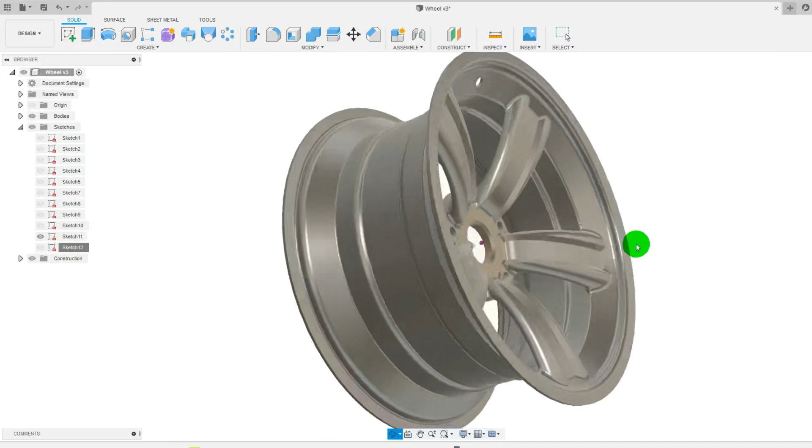I've recently started Fusion 360. I'm probably about 10 hours in, and I was able to make this wheel. I've been really enjoying Fusion 360, so let's go over how to make this, or at least how I made it. I did not use surfacing, and that would have been a great way to make a wheel too. So if you're not familiar with surfacing, this could be the video for you. Let's get started by making either this exact wheel or one much like it.

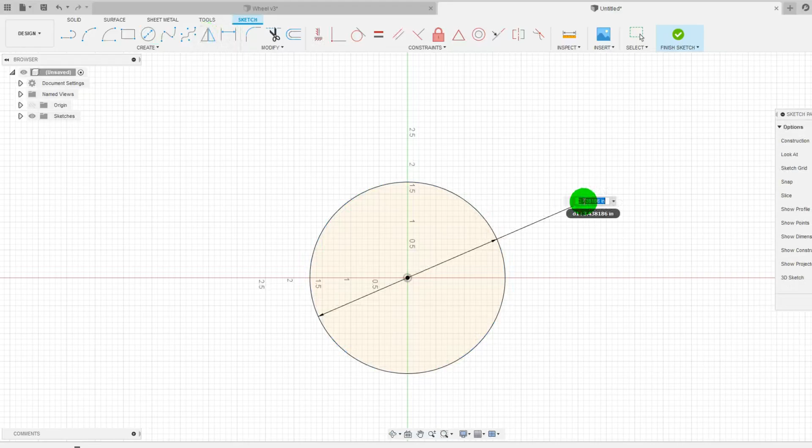I'm going to start with a new design, and let's start by creating a sketch on this face, and I'm going to start by making a mounting plate.

Let's make that 5.5 inches in diameter. We'll make a second circle, and we can make that vertical with the origin. And we'll give that a dimension of something like 2.25, and we'll give this a diameter of something like 1/2 inch.

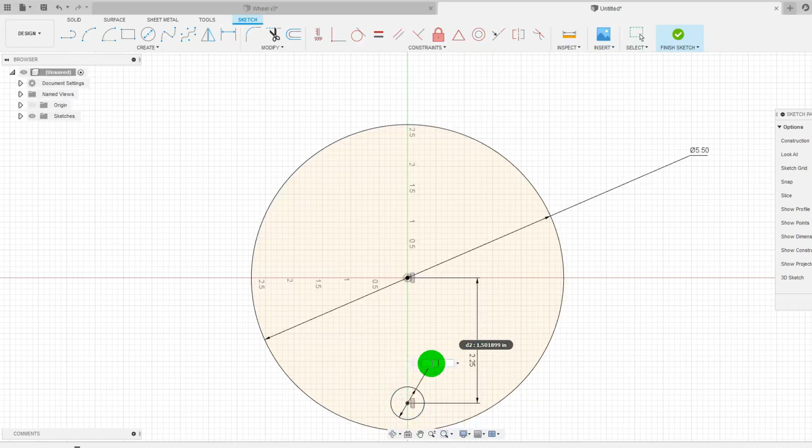And let's go ahead and extrude that. So we'll extrude this profile, a distance of say 0.5 inches. That looks about right. And I can immediately do a circular pattern to cover all the holes. I think it's a little bit more efficient to do a pattern than to sketch it out.

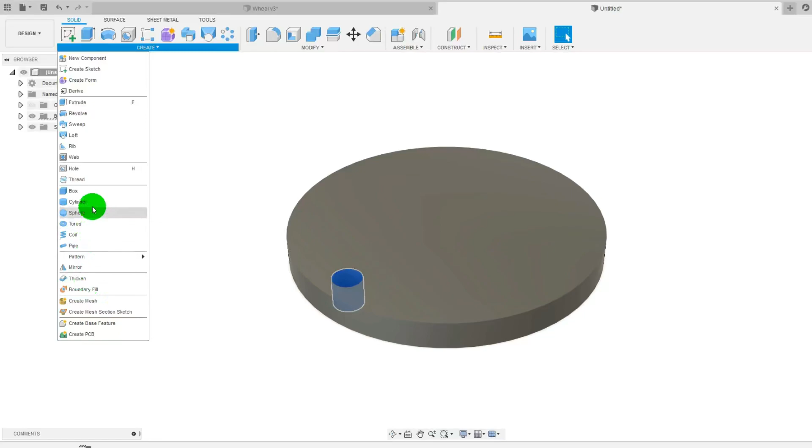So we'll go with pattern, circular pattern. I've got this object selected. Axis will be here. It's a wonderful feature to add the axes in like that in the graphics display. We'll say OK, and there's our pattern.

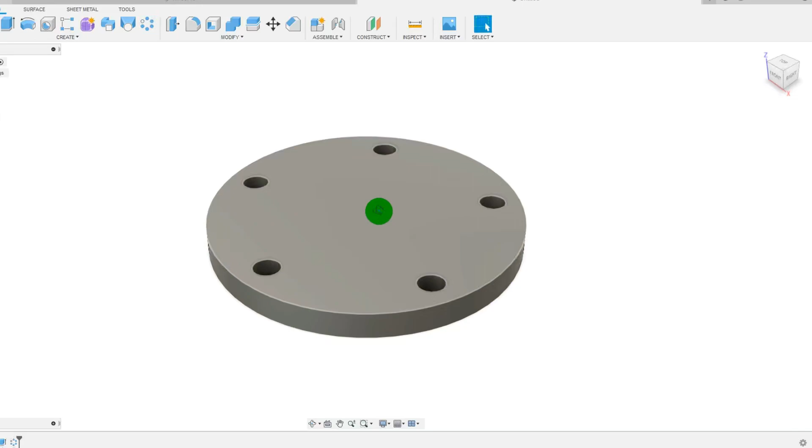The next thing that I want to do is maybe make a sketch for my spoke, and I can do that right on this face. I'm going to start with a center point arc off of the origin.

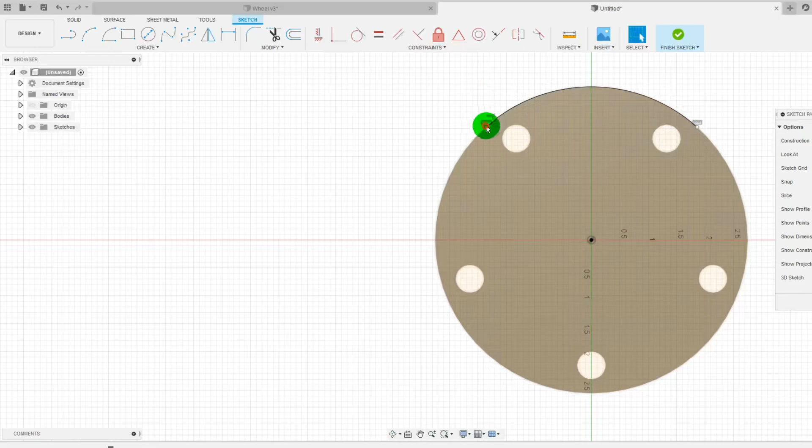Fusion already knew that I wanted to make that coincident onto the edge of my face, and by making them horizontal, we've only got 1 degree of freedom, and I really like the way that it illustrates the degrees of freedom. So to sure that up, let's give this a dimension. We're going to call that 1.95 inches.

I'm going to make a 3-point arc now, and I'm going to make this horizontal to its center point so it ends on vertical, going straight out. We can give that a radius, and I'd like to make that 1.75 inches.

From here, we'll do a line and a line and a line. We'll do an angle. 135, 1 inch.

This point to the origin, we're going to make 1.675, so that the spoke protrudes in a little bit.

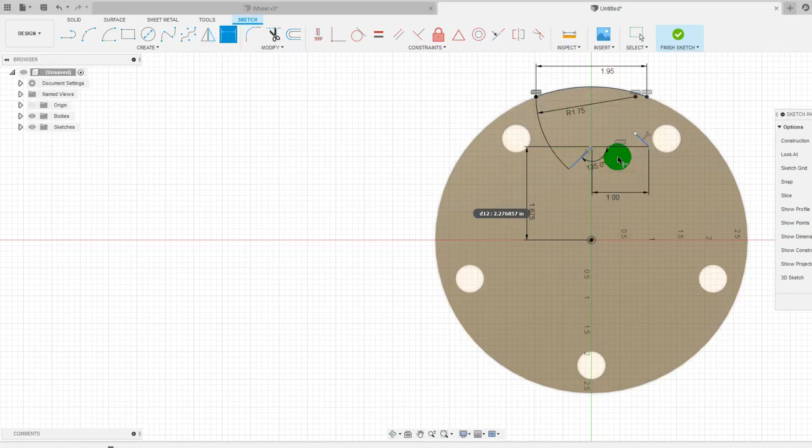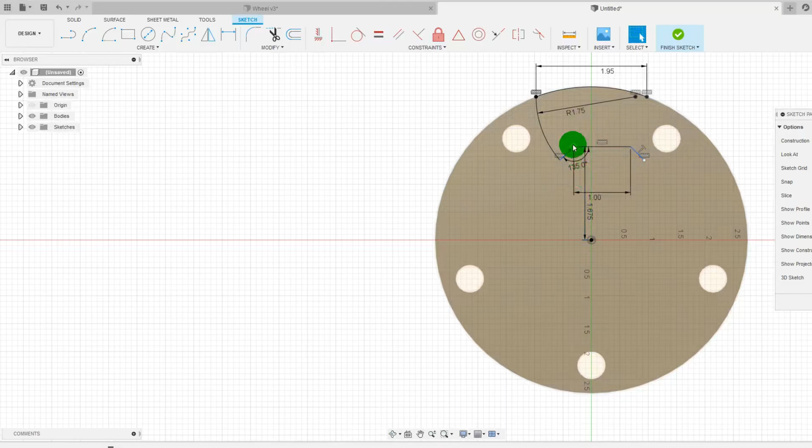And I can go ahead and select these two, make them horizontal, so we have more of a symmetric feel to it. And also, I'll come up here and choose equal length between these two. Oh, but I've got an over-defined error, so maybe we won't. Since they're horizontal, that's pretty good.

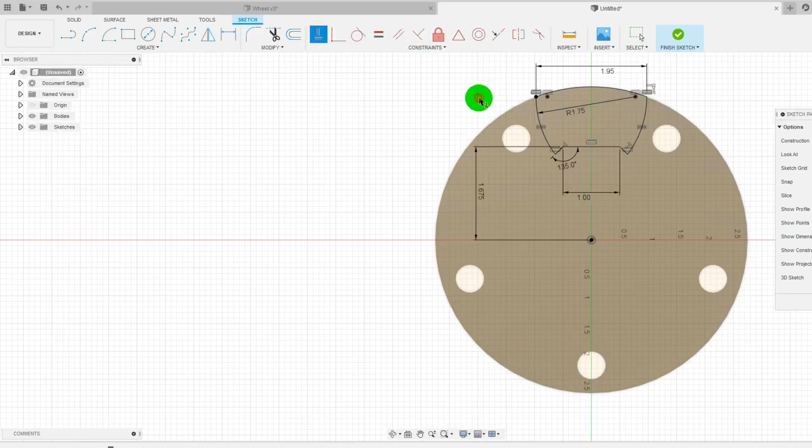I guess the last thing to do is add an arc. Oh, that's a center point arc. We'll add an arc on the other side here. We're going to choose equal between these two. We're going to take here and here, make it horizontal, and there we're fully defined. So I'll finish that sketch.

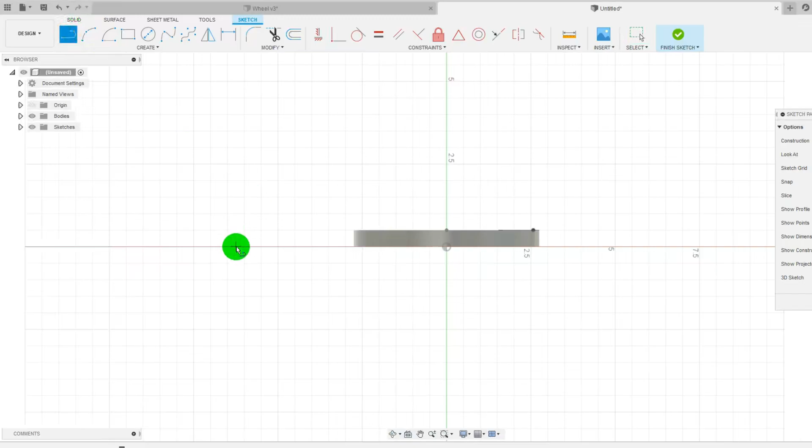Let's move on to the next one. I think we'd be wise to make an outer body for the rim. So let's create a sketch here, and let's get cracking on that other sketch here. So I'm going to make this horizontal with the origin. I can make that a simple distance of 1 inch.

Next thing to do, we'll grab a 3-point arc and another 3-point arc. I'm going to choose tangent between these two, and we're going to make that horizontal so that these points will be tangent to vertical.

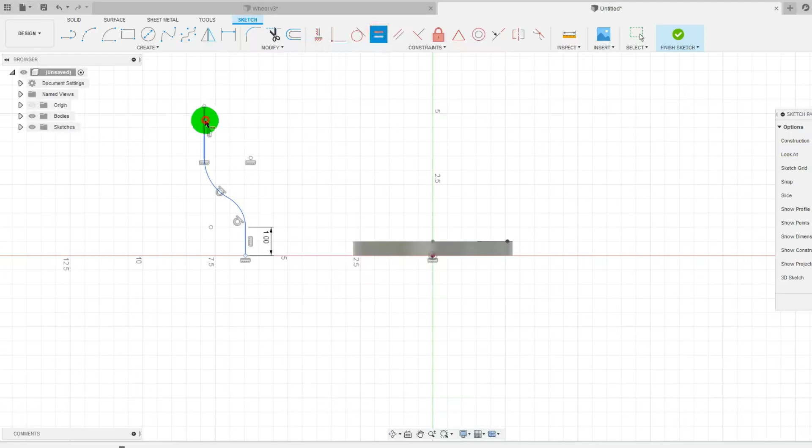And make another vertical line. I meant to snap those together, so we'll make those coincident. And I'm going to choose this line. I'll choose the equal relation between these two lines, so they're both an inch.

And the question is, how much do we want to offset these arcs? We're going to go from here to here. We're going to make that 0.15. Except I don't think I've got my tangent relation.

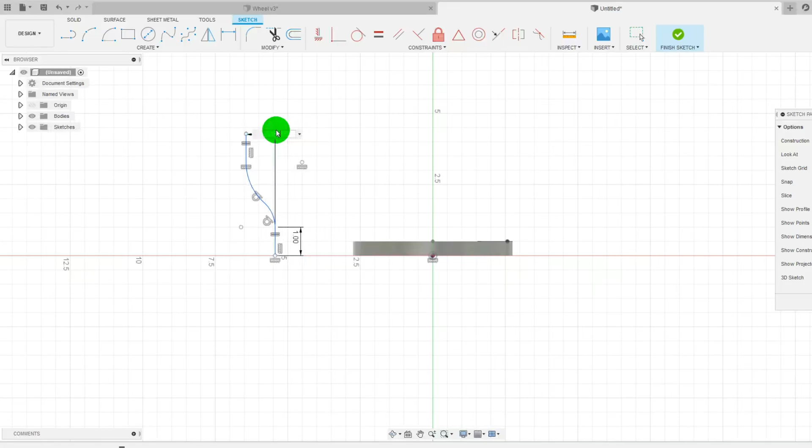I guess I do, but it's snapping in the wrong way, so maybe I'll step it down to 1, then 0.5, and then 0.15. That looks about right.

I'm going to bring these two arcs a little bit closer together, and highlight them to make sure that they're equal. That'd be a great constraint to have as well. Well, actually they shouldn't be equal, because we're talking about having a consistent thickness, and one would be an outer radius and the other would be an inner radius. So let's get rid of that constraint, on second thought, to keep a consistent bending profile.

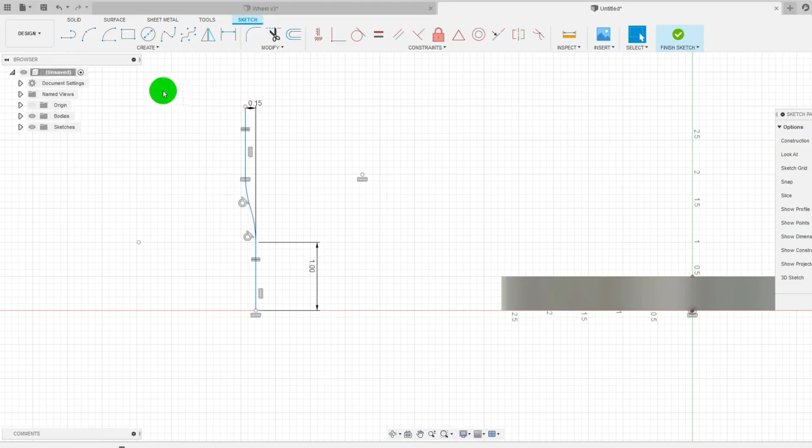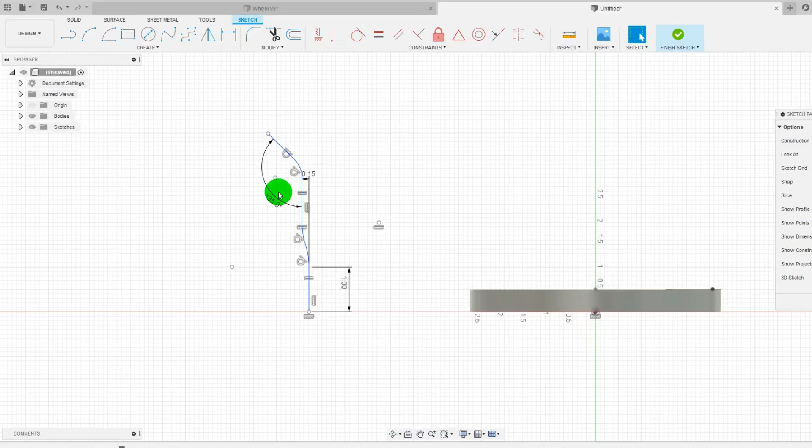But the next thing I'd want to do is add a 3-point arc up here and connect that into a line. I know I ought to be using the actual tool that converts a line into a 3-point arc. That would be handy. Let's grab here and say 135, then grab a 3-point arc here, and I love that it added that tangent.

We'll select these 2 points and make them horizontal. We're going to come up here with a straight line. Oh, I accidentally drew 2, so instead I'll add in my 3-point arc, again with the tangent tool, and we'll select these 2 and make them vertical.

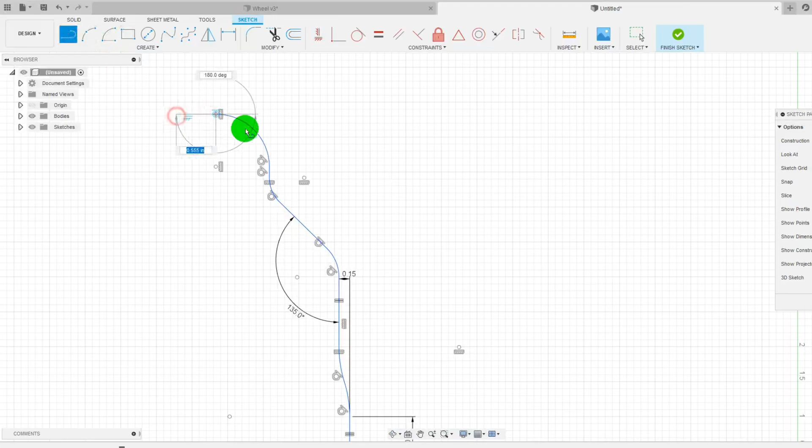Okay, so this is the point where I get to choose some of the other dimensions, like what rim diameter I want. Let's try something like an 18-inch wheel, so that would be a 9-inch radius, I guess. And then from this outer point to here, we can offset that by something like 0.75 inches.

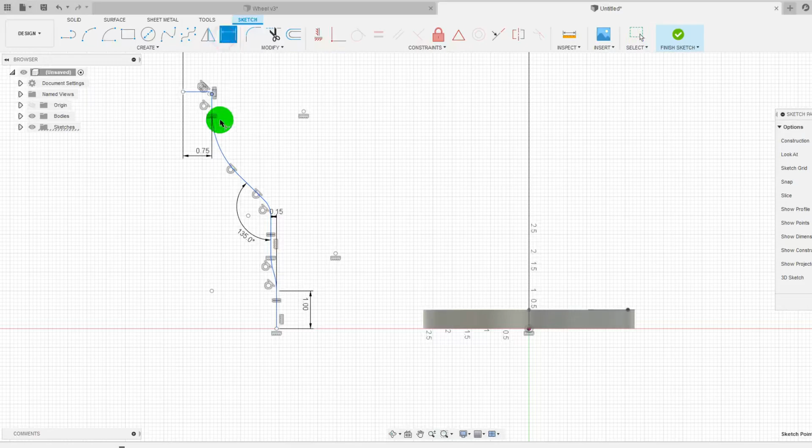I can do the same thing from here. Oh, I got 2 points selected there. From here to here, let's go with something like 1 inch.

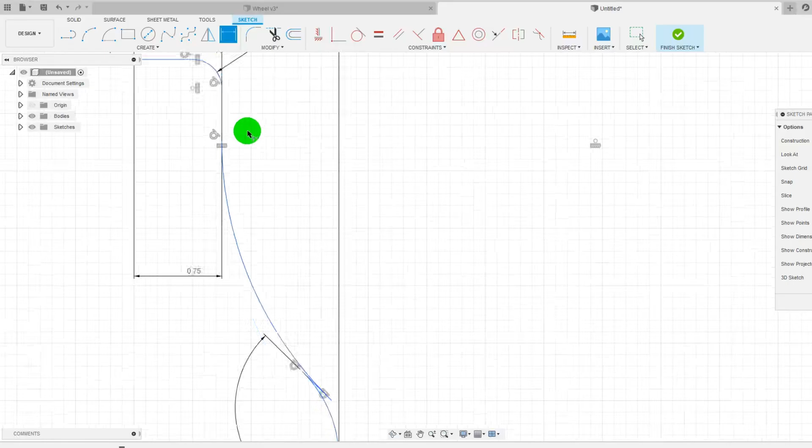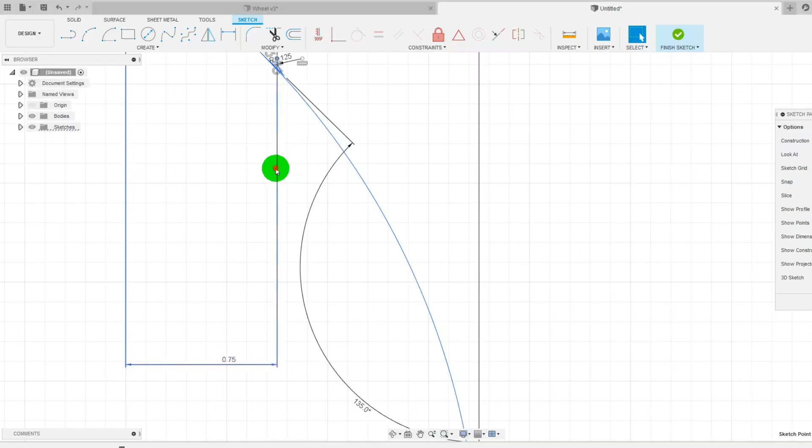And then let's make an outer radius. Let's establish that if we're going to add thickness on this side, our outer radius is going to be 0.25, right, 1/4 inch. And that means that this is an inner radius, and let's say we want 1/8 inch thickness, so that would be, of course, a 1/4 inch minus an 1/8 inch is an 1/8 inch, so that's our remaining radius. We move that back down where it belongs.

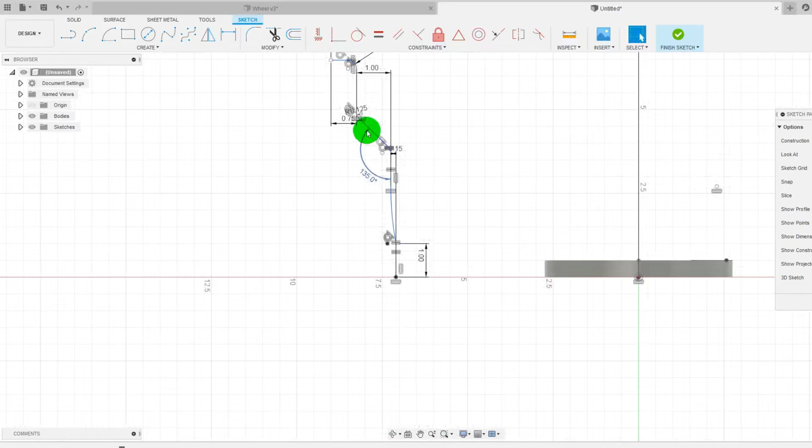So since these have basically the same concavity, as you can think about it, then we'll make those equal, and this has the same concavity as that, so we can make that equal here. And then I have a concavity going this way, which I can make these equal. And that defines most of our sketch, but the question is,

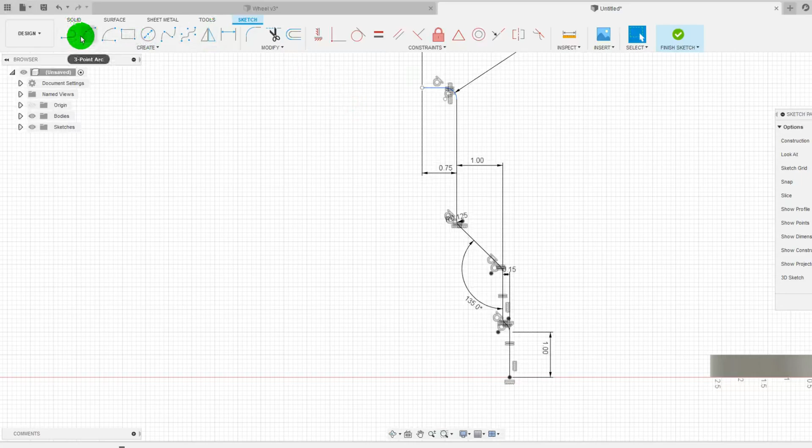what width do we want on the rim? To answer that, I'm going to go with, say, something that's 9 inches wide. And to do that, we go to our 0 point, right? This is going to be a 0 offset, and this is where you decide your offset to.

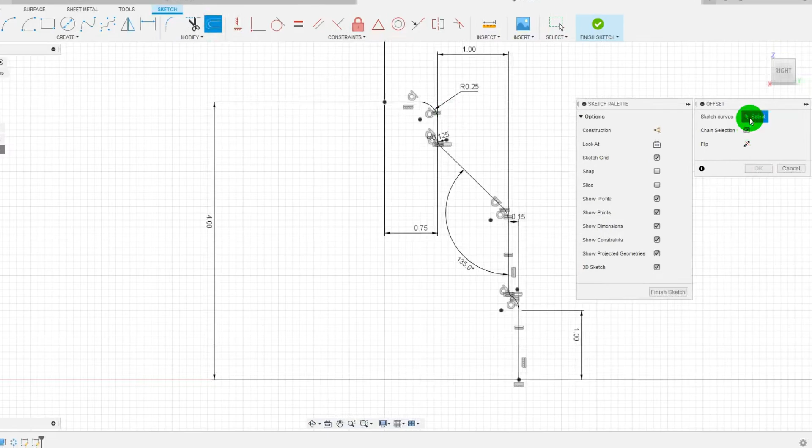With that fully defined, let's do an offset function here. It'll ask me which sketch curves to offset. We're going to say negative 0.125, and OK. And there we go. So we've got a consistent profile that's been offset.

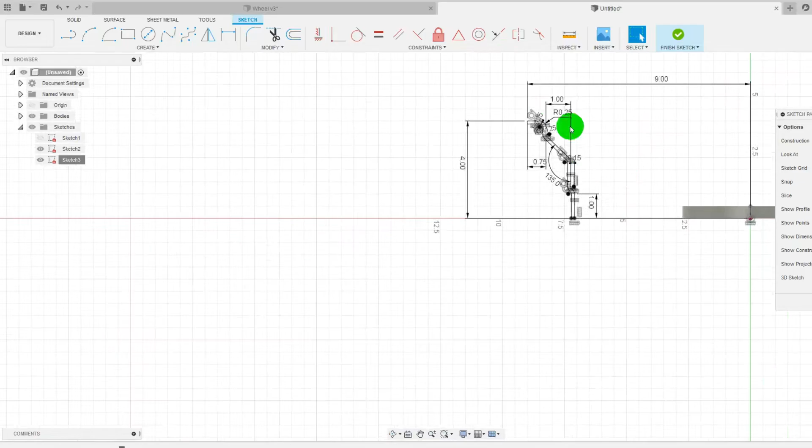The last thing to do is this here. And now we would probably want to mirror some sketch entities. So in order to mirror, I'm going to create a construction line, right? We're going to create a line from here to the origin, and then I highlight this line, construction. Now I can say mirror,

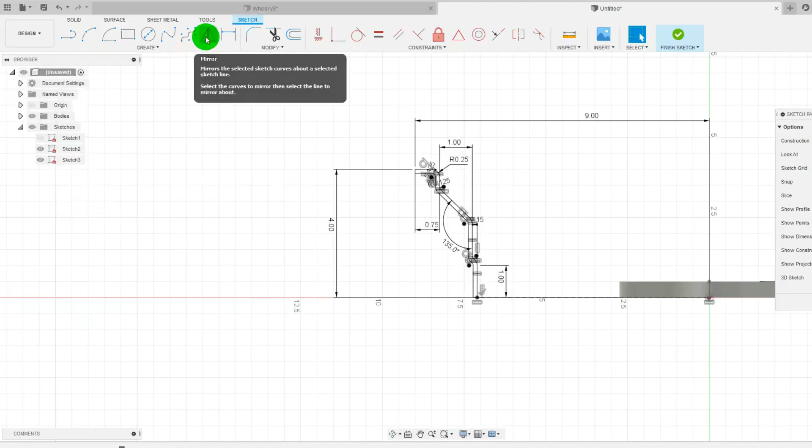or I can just choose it from over here. We're going to select objects, and then we can select mirror line. It gives me a nice preview. We'll say finish sketch. And one thing I want to check is to make sure that I have an enclosed volume. It looks like I do.

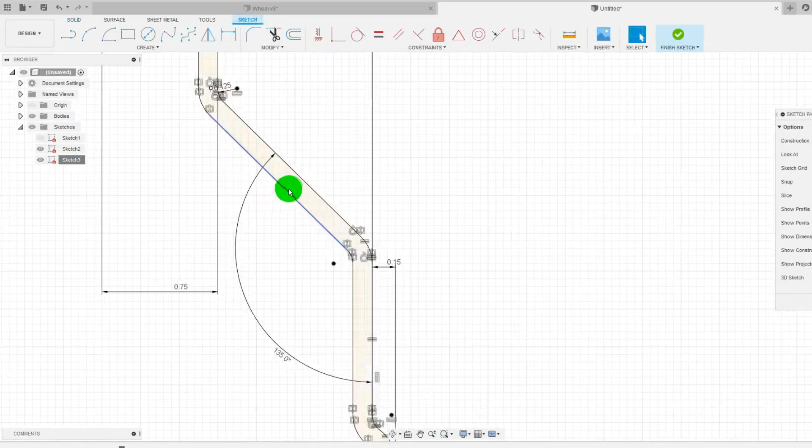You can see a difference in shade from the inside of the sketch to the plain background. So make sure that, yeah, it doesn't look like there's a solid line there. So we've done everything correctly.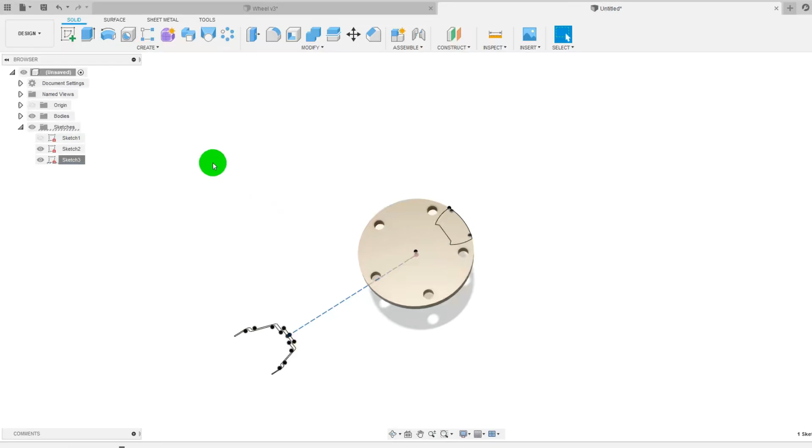The next thing I can do is to start my revolve. And that's kind of enjoyable because you start to see the wheel coming together. We're going to say revolve, choose a profile, which I would like to make my sketch, and then we're going to choose axis, vertical axis. And that is looking kind of wheel-ish to me.

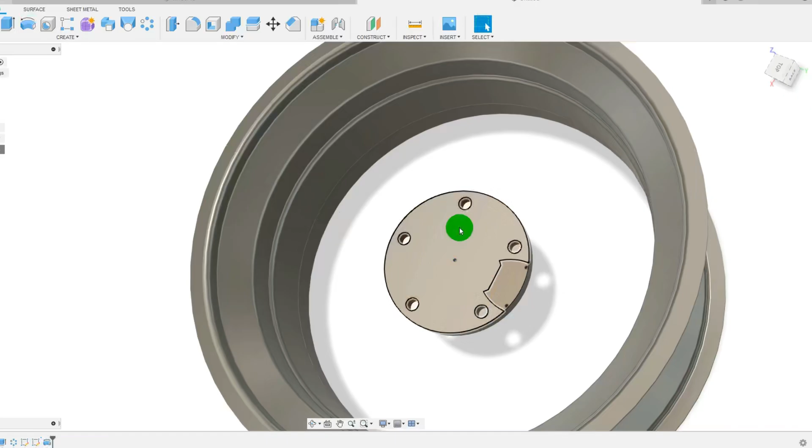So we'll say OK on that. Next thing to do is make a second sketch for our spoke. Let's do that by creating a sketch. Actually, let's finish sketch. I can delete that, didn't mean to do that.

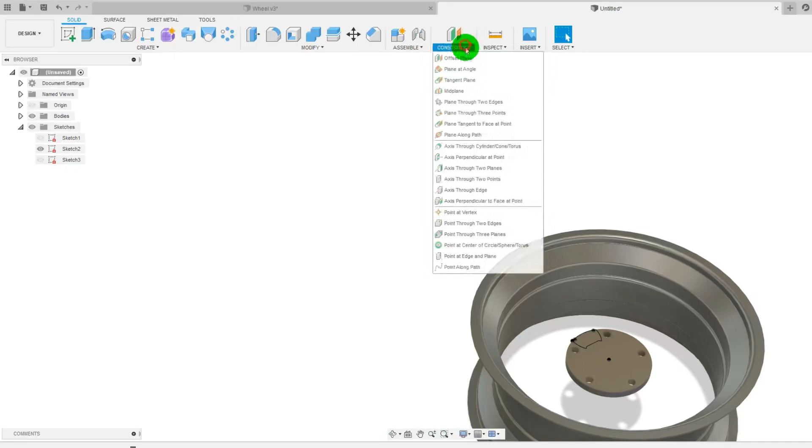Let's instead construct an offset plane to this plane. We'll make that, if it's an 18-inch wheel, then we'll go 9 inches, and that's the correct direction. You'll notice it corresponds to the side that I have this first sketch. I can choose this plane, sketch, and here we go.

Let's make another sketch. I like to loft the same number of entities to the same number of entities. I don't know if Fusion is sensitive to that or not, but it works well no matter what platform you use to do it that way.

Let's use the vertical relation on this line, and I'm going to make this line a construction line. I'm going to go with a 3-point arc.

Before I get too deep, I'd probably be wise to give this a dimension. So let's go with 2.5. I want my 3-point arcs to end on vertical, so I'm going to select these two lines and make sure it's horizontal to its center point of rotation.

Grabbing another 3-point arc, vertical, or tangent to vertical, and then choose equal and make sure that these arcs have the same radius. I could probably go a step further, and it looks like the endpoints are horizontal anyways.

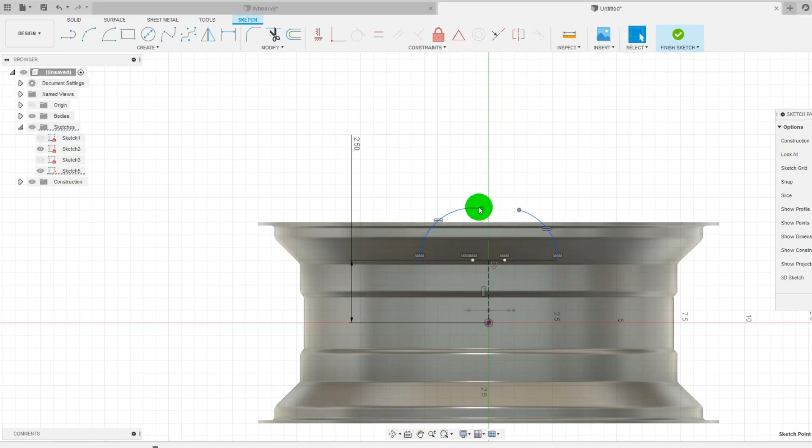Next thing I'll do, create a line, and another line. I want to use the same angle, so go with a dimension of 135 degrees. I want this to be about 1 inch wide, and I want to give this an overall width of 3.5 inches.

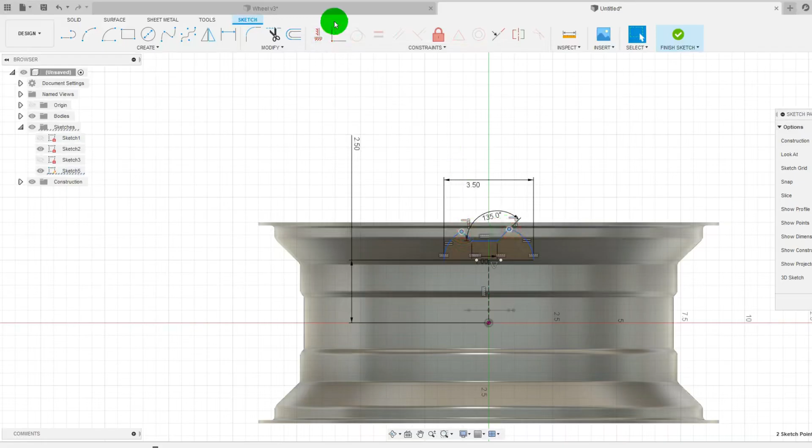Maybe I can choose these arc endpoints and choose horizontal. I'll make the other one 135 degrees as well. I think one of the last things to do is give this an overall height. We're going to say something like 0.73.

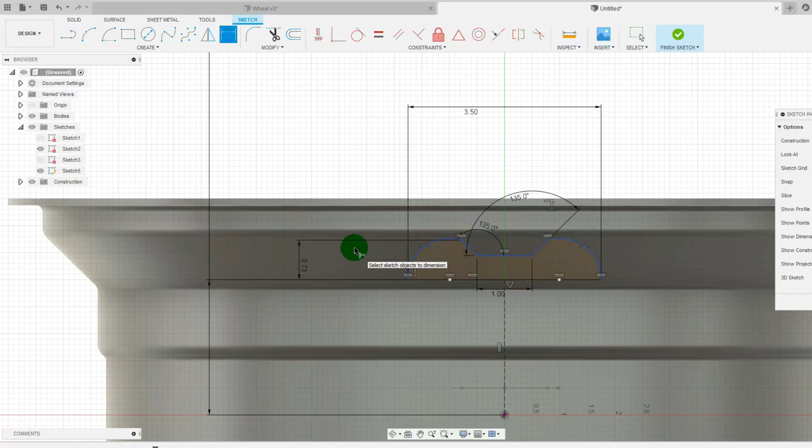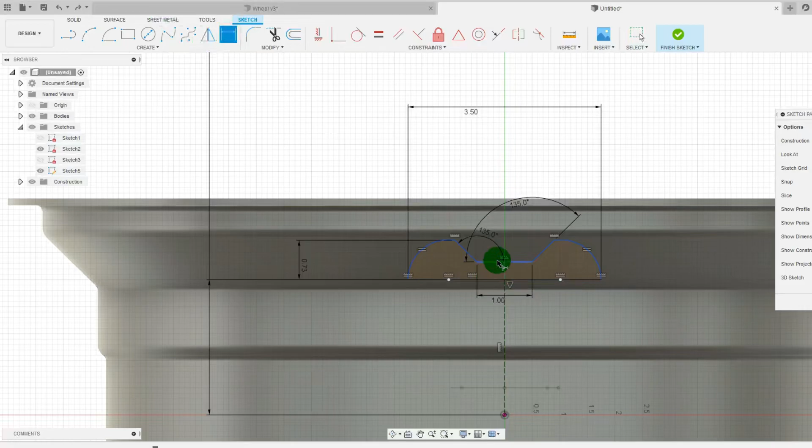And I'm going to make these arcs tangent to horizontal, and that gives us a spoke profile. But when I look at it, I don't really like the way that looks. So I'm going to Control Z, and I'm going to give this a height instead. Let's go with something like 0.45. And that looks a little bit more realistic.

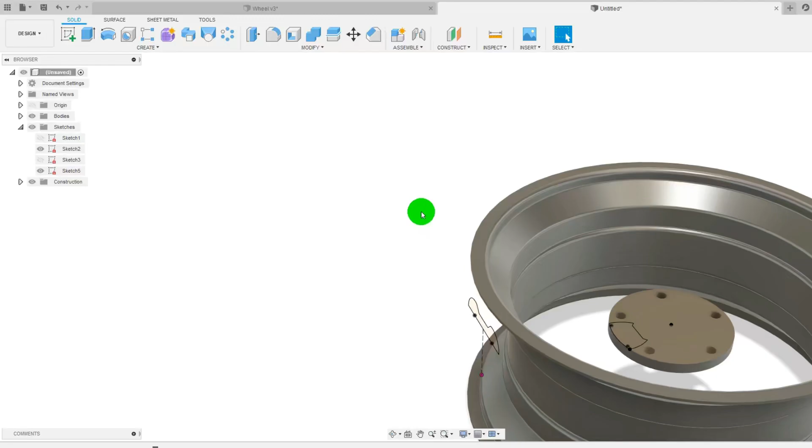So we're going to finish sketch. And there we've got two nice sketches. The last thing I'll do is maybe a little spline to unite the two. I'm going to create another sketch here,

and I'm going to create a control point spline. Fit point spline I have less taste for, so you can always come here and choose control point spline if you don't have it already. I'm going to do a 4-point spline. 1, 2, 3, 4.

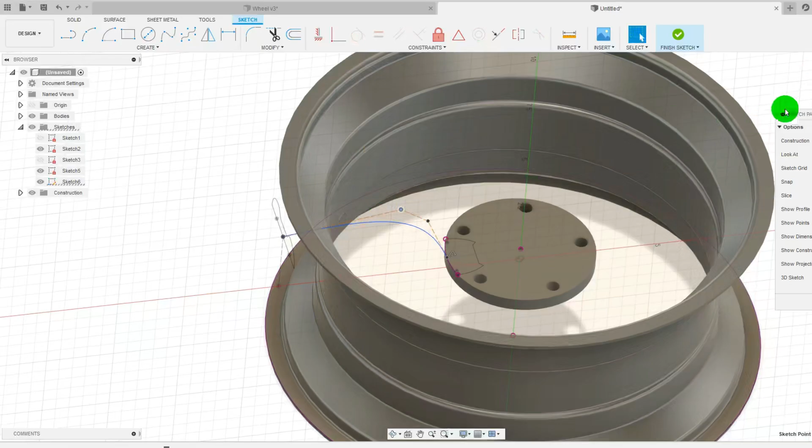Next thing, I guess to better see, I'll hide my bodies and get normal to my sketch. Select these two, horizontal. This and this will be vertical, and that covers the profile that we want.

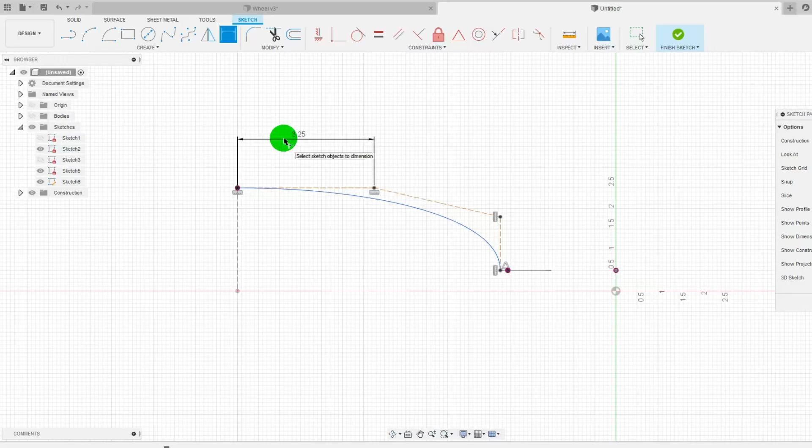Then I just have some simple dimensions to make. This point is going to be probably 3.25 inches, let's say. This one here, 1.25. I'm going to finish that sketch.

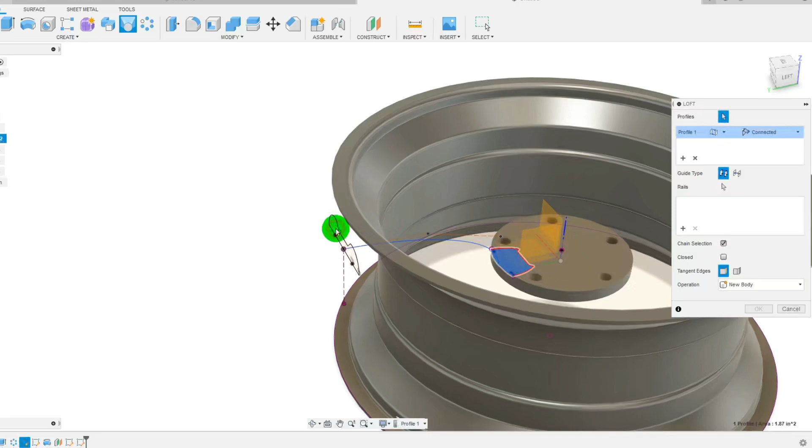And show my body again. Let's go with the loft. Our profiles to select here. To, not that point rather, but that inner profile. And I have a rail that I can select to be here.

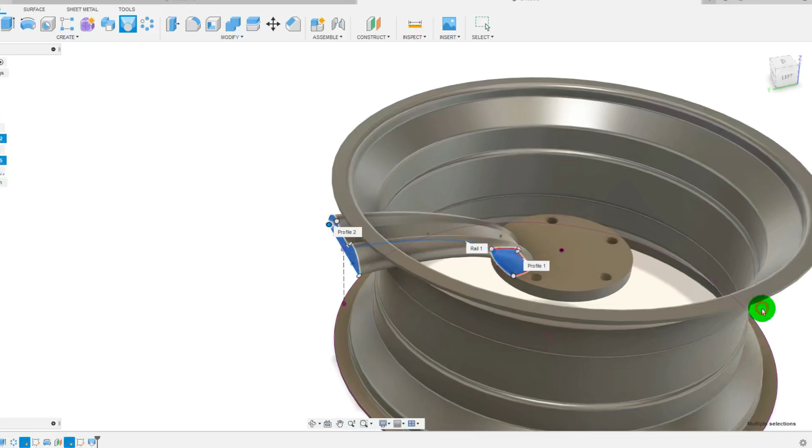And instead of a cut operation, let's do a join. And there we have it.

Okay, with this loft completed, let's circular pattern. I'm going to choose this object, this axis, and we're going to make 5 of these around the axis, and OK.

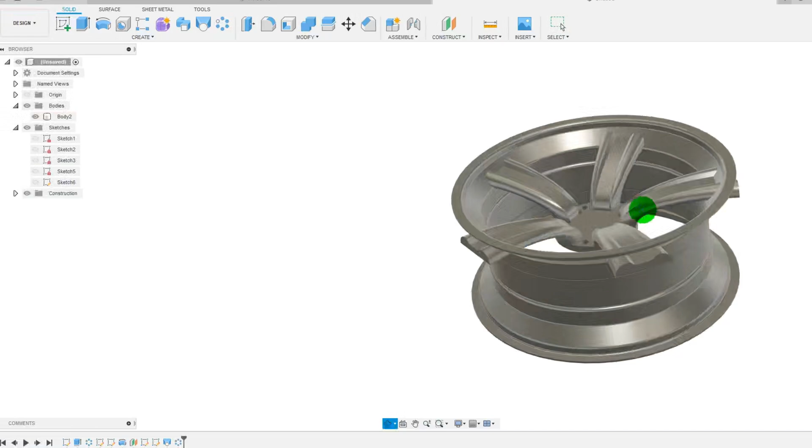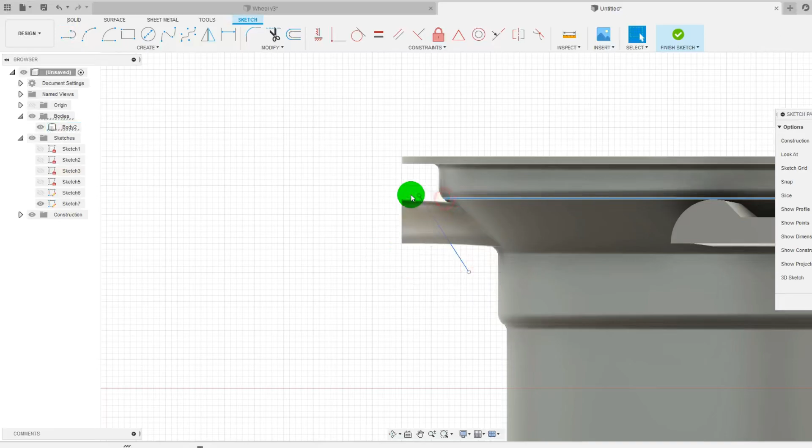Now you can see the spoke is poking through the inner wall there, which I find unpalatable. I'm going to create a sketch on either of the two planes that are normal to the center axis of the wheel. And if I create a basic line, then some of these lines become selectable. I choose coincident, then I can choose the endpoint of this line in coincident. Same here. Oh, but that's the wrong line.

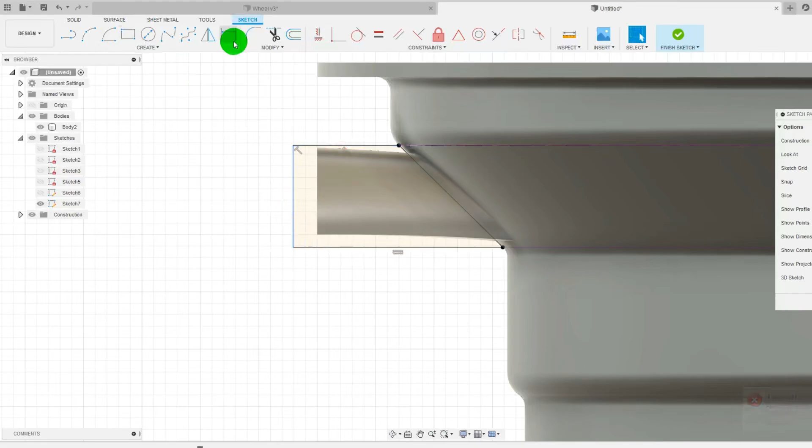Coincident. Now we're running along the very outer edge of this wheel. Choose a line—yep, that encompasses what I want it to encompass, so that looks good. We're going to make sure these are parallel to horizontal, then add one dimension to shore everything up.

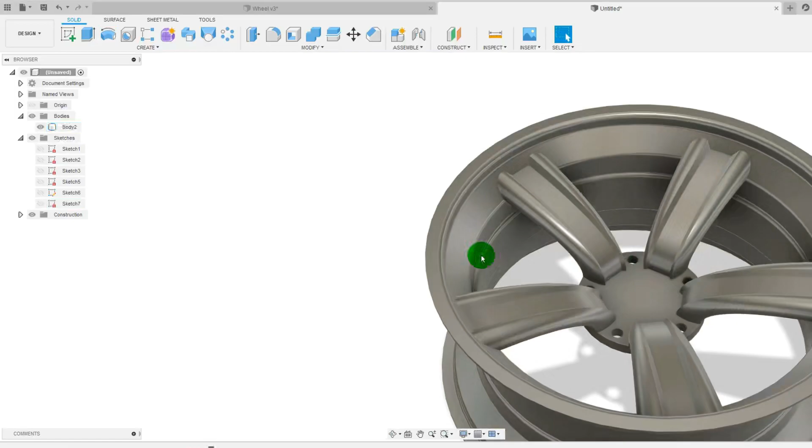Let's say that's 2 inches for simplicity. Finish the sketch, and we're going to do a revolve right around that center axis, set to cut 360 one side. Very good—so we've eliminated the protruding spoke problem we had run into.

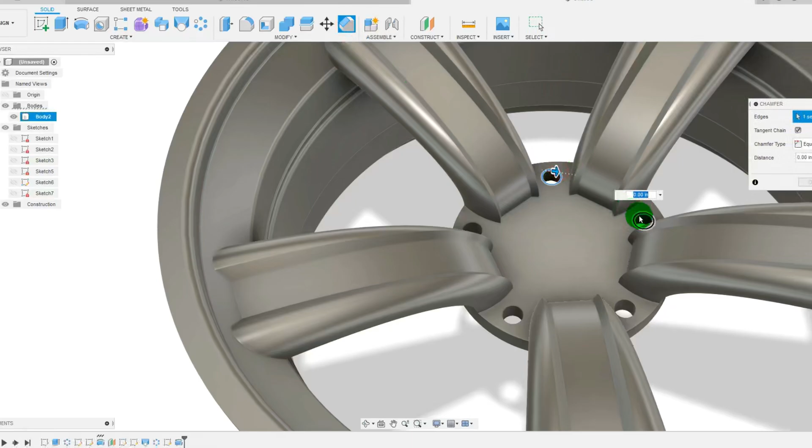Now we can add some detail to the wheel. I'd like to go with something like a chamfer. There it is. So if I chamfer these something like 0.125, that looks like a reasonable chamfer for some nuts to go on.

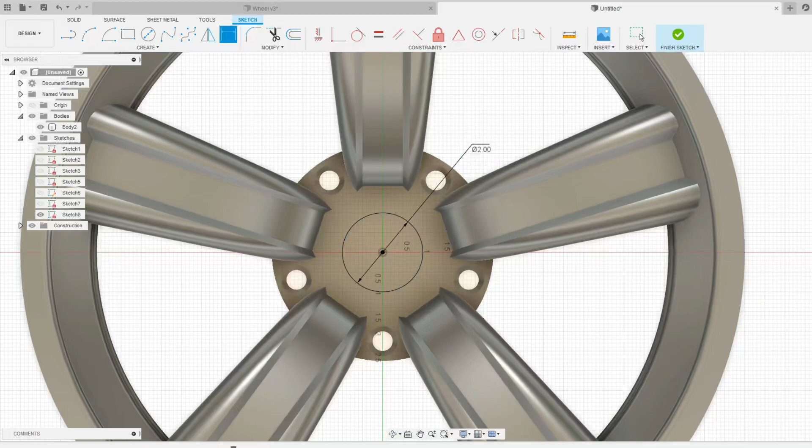Say OK to that. We can choose this face, create a sketch for a center hole, as wheels tend to have. We'll make a diameter on that, say 2 inches. We'll finish, and then do an extrude cut.

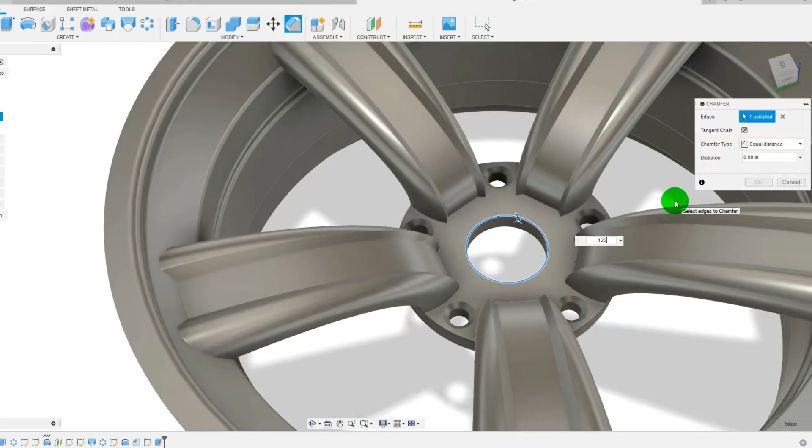We'll select our profile here and change distance to all, and notice it cuts it out for us right there, with cut pre-selected. With that, we actually probably could have dimensioned those off the same chamfer, but that's alright. Give it a 0.125 chamfer.

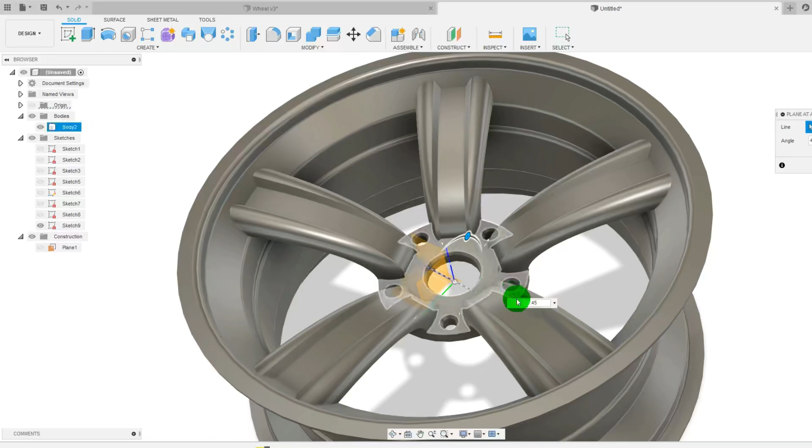Alright, next I want to make a valve to fill up the tire with a valve stem. So I'm going to create an angle plane—plane at angle. I'll choose this line and say 45 degrees, which gives me this angle that would run me into the face of a spoke over here. So I'm going to specify plus 90, and that tilts me in a direction where I have this nice empty face right here. So I'll say OK.

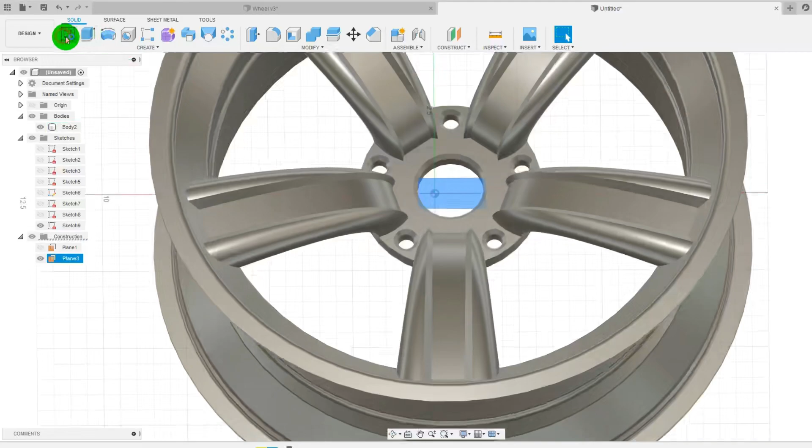This plane is a little bit wonky, so let's extend that and create a sketch. I don't have an origin that's really centered, so I'm going to be judicious about what my center actually is. I'll create a dimension here—perhaps we'll offset that a half an inch. Looks about right.

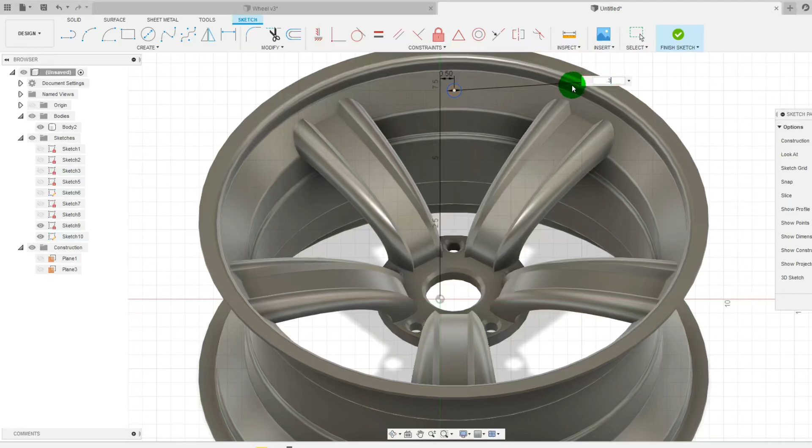0.25—I don't know what size valve stem holes are. 0.5, I guess, that's maybe a bit big. 0.375. Alright, so I want to make sure this is centered on the face. And now that I think about it, I can get rid of this dimension.

Let's be exact here. If I make a line and make it for construction, I can come over here and pull out the center point right there. If I make these two vertical, then I know that that's in the middle. I'll choose horizontal instead—these 2 points and these points there. So now I've got a construction line with my little circle coming off.

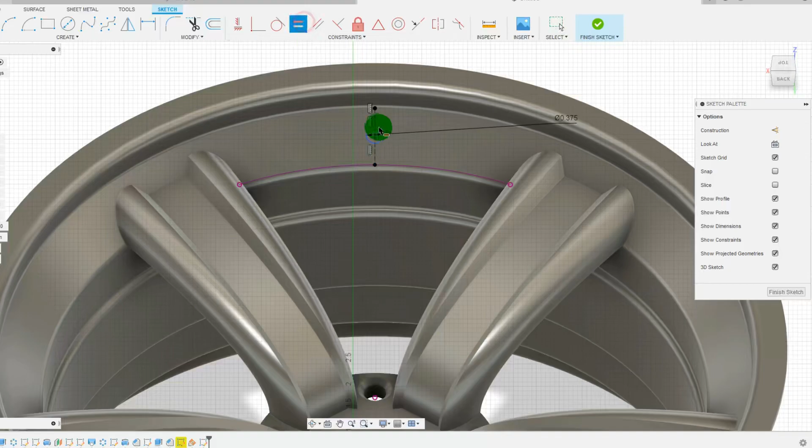Alright, now I want to choose a line—we're just going to draw an arbitrary line, again making it for construction. Notice it's already preset to be vertical. Choose these 2 points and coincident. Choose this and coincident. And now I can choose equal. Boom, we're centered and fully defined.

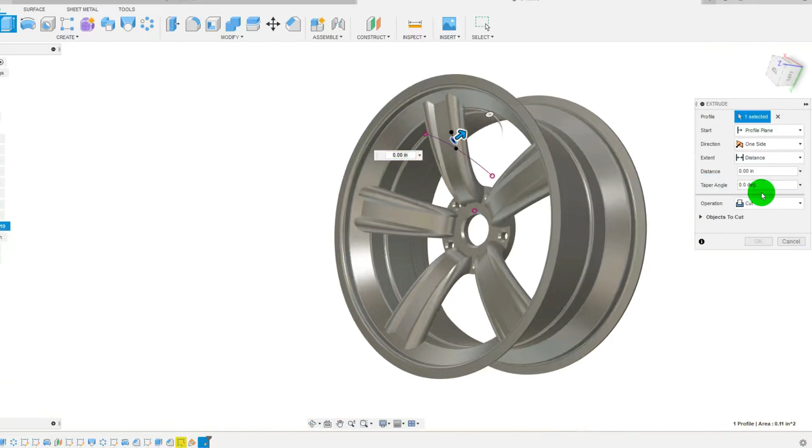So we'll choose finish sketch, and I want to cut that—extrude, cut. Profile—I've already got a profile pre-selected and it looks like the right one. I'm going to say all. And there's my valve stem hole.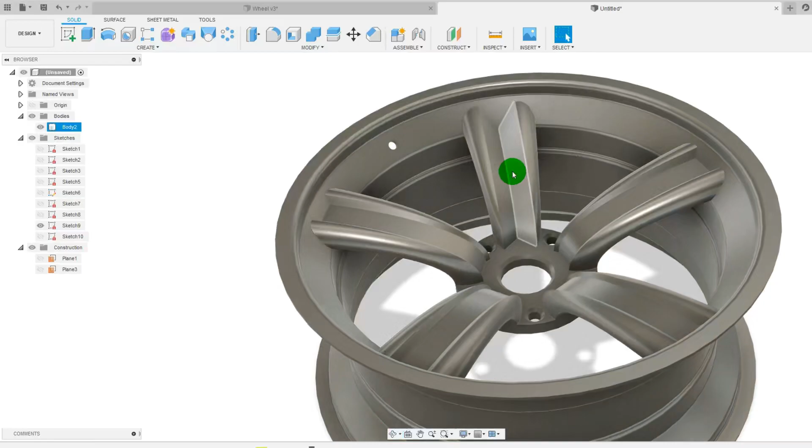So that's a reasonably realistic wheel. You probably want to add some fillets. You have some cool options too, like you can right click on this face and say delete to get a kind of different spoke profile if you want to. I don't think that's an amazingly cool profile, but you can experiment with all sorts of stuff when you go to delete faces, or just delete the entire feature. I have a 4-spoke wheel.

But yeah, add some fillets if you'd like to.